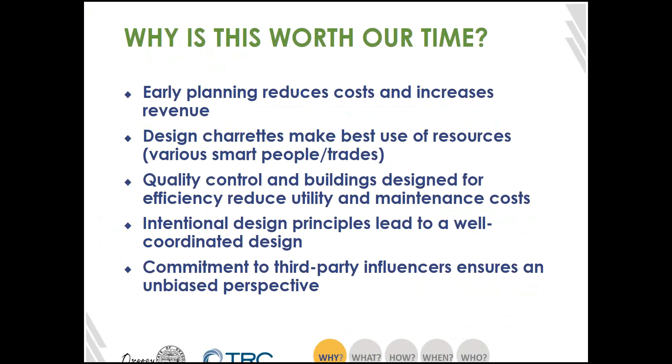There's all sorts of applications of waste within this process. And by doing an intentional design process ahead of time, you can really stem that waste down, make the best value of the resources you have in front of you, both the materials as well as the human resources, the smart people and the trades that you're hiring. You can reduce utility and maintenance cost, and you can really lead to a well-coordinated design and a well-coordinated design follow-through by following some of these best principles.

So the good news is that there's great evidence out there that projects that have gone through either an integrated design process or an intentional design process have better outcomes. They're able to reduce costs, depending on the study you're looking at. The UK Office of Government Commerce found 10% savings on the cost of construction on a single project. Some other materials we've looked at have said there's 30% savings potential across construction over a series of projects. You can really reduce design cost, reduce implementation cost, and still adhere to advanced design principles and reach more advanced goals on energy efficiency, on design, on everything else.

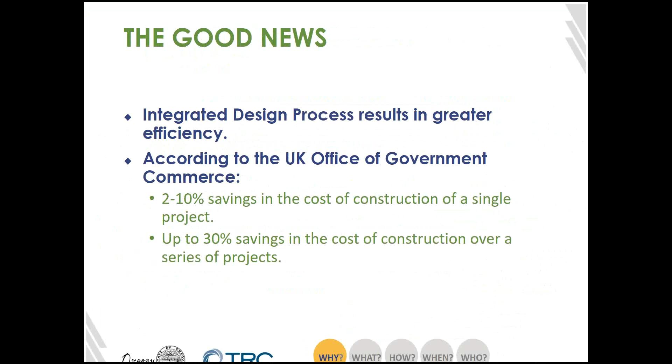So the value of this to the owner and the developer is that it reduces costs. It ensures that there's minimal changes and increased oversight to the construction schedule and the quality of work. It ensures that the principles and intentions you're trying to put forward in your project actually have follow through down the entire course of events and get implemented properly in the field, verified in the field, that all of that intentional design actually gets implemented in your buildings themselves. And the process gives a great feedback loop of construction cost, performance data, the kind of information that helps your business practice operate appropriately and increase profits.

One great example of this is from a firm called Green Canopy Homes. They were a small, one or two home a year builder that expanded and tried to get into that middle range of 10 to 20, focusing on townhomes quite a bit, and they really wanted to reach that niche market of green, of energy efficiency. And they did very well by following an intentional design process to achieve that.

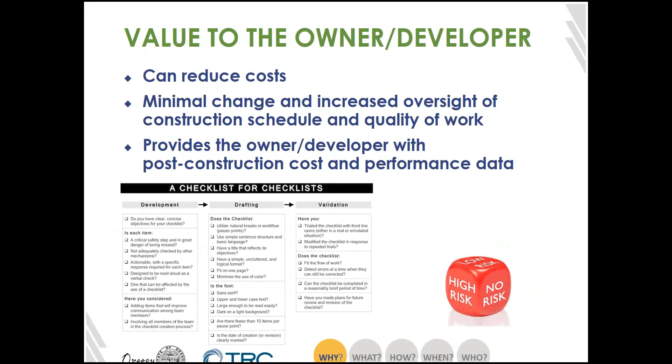So I'm going to turn it back over to Dan.

Thank you, Matt. Now we're going to get into what we actually mean by some of these terms, so we'll dive in a little bit into this difference between intentional and integrated design. But first, let's just talk about at a minimum. We don't want to scare you away. This isn't the kind of thing where we're saying you need to dive into the deep end without your floaty arms on. This is more about taking this in an incremental step. So at a minimum, what are we hoping you'll take away from this?

We hope you can start off by committing to a pre-construction meeting. So before hammers start hitting nails, can you get a meeting together that makes sure you have the right people in attendance, meaning your key trades, your designers, your energy consultants. And we really want to see that the plans get reviewed before any construction happens, that energy efficiency measures are included in both the plans and the scopes of work for all the trades, and then key responsibilities are assigned to make sure that this will actually happen as it's designed.

We really want to hammer home that having the right people in the right meetings and getting the right responsibilities into the right scopes is the magic that makes this happen.

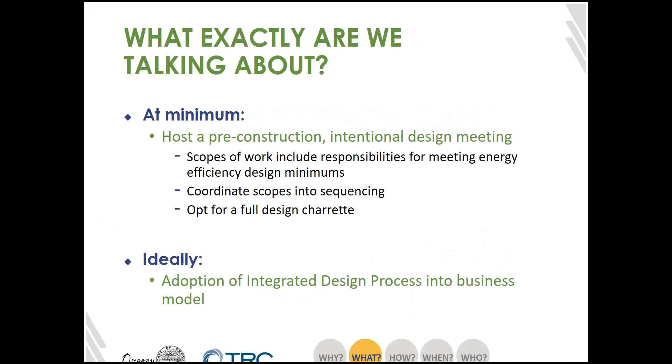So now let's talk about this difference between intentional and integrated design. Those of you from the architecture background, or who have been in green building or energy consulting, are probably familiar with integrated design as a topic. And some of you with your Six Sigma black belts and lean production training are probably familiar with integrated project delivery.

Today, we're really focusing on intentional design, the first step here: really making sure that roles and responsibilities are very clear and assigned, and that a champion leads some sort of pre-design meeting that puts these things into place and helps ensure that what is spoken for at the beginning is actually carried through the entire process.

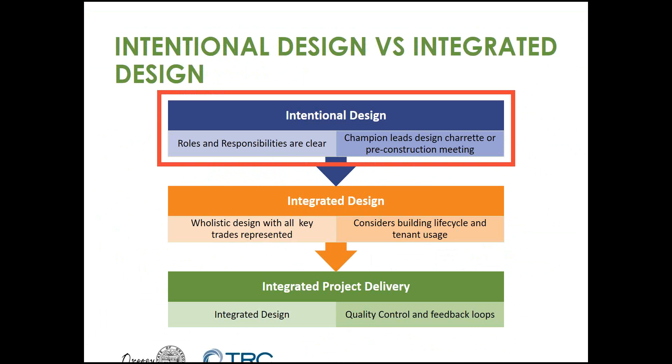Now that said, you don't have to stop at intentional design. That's our minimum. It turns out the value actually increases the more you adopt the integrated design process. It allows you to think about things in different terms, and really focuses on being able to adjust as you go and having open channels of communication.

A version of this probably already exists for you. The problem is, for most developers and owners, they don't have it written down. It's not formalized, it's an informal thing, and this allows for gaps to happen. It allows for mistakes to be repeated historically over time. So formalizing it is a key to helping improve your designs and lower your costs.

Integrated design can actually open plenty of benefits for a minimal or even zero incremental cost when performed repeatedly, as the example that Matt just gave with Green Canopy Homes.

On top of all that, depending on the programs you're in, some programs such as LEED, National Green Building Standard, and some others similar to that will actually give you rewards in terms of points, or in some cases even incentives, for doing integrated design or early design assistance meetings or design charrettes.

Currently, the Oregon Multifamily Energy Program doesn't have a specific incentive for this, but if you've looked at how our incentives work, you get a greater incentive per kWh saved the more whole-building an approach you take to this. We are firm believers that intentional design is a critical piece for those of you following the whole building path, whether it's retrofit or new construction. So in a sense, this is one of those key pieces to helping make sure you're cracking open the higher incentives per kWh saved.

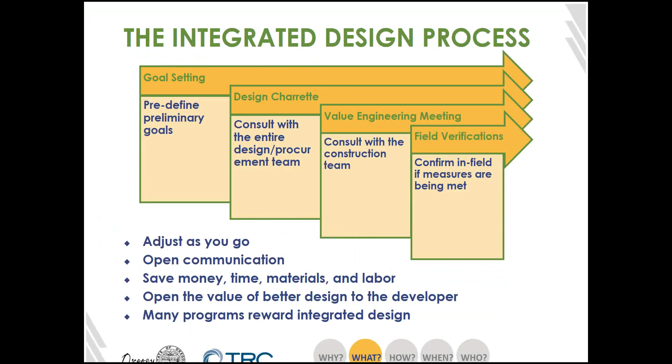And quite honestly, I spent 15 years in the construction industry. When we got to do jobs that started with intentional design or integrated design, it was honestly more fun for everyone as well, because everyone has a slightly higher degree of buy-in and is a little bit more on board with making this project work.

So with that, I'm going to hand it back to Matt, who's going to talk through the next section with you. Thanks, Dan. So on the how side, first let's go through the anatomy of intentional design, some of the big concepts we've already spoken of in prior slides. There's a bit of a rehash as well, and that'll come up as we go through various themes.

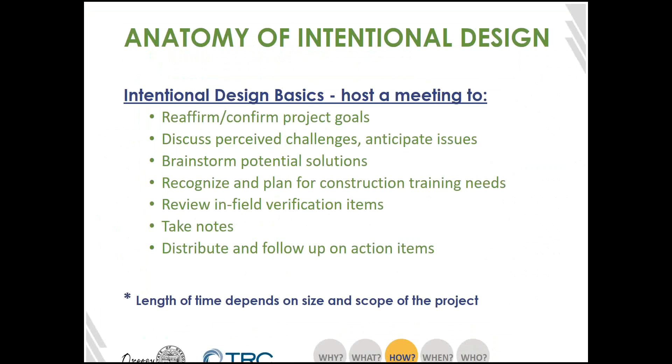So planning for that meeting in the pre-construction support is valuable. If this sounds like a lot, the truth is you're already doing this to some level. You're already gathering your team together to make sure that everyone is on the same page. You probably host a safety meeting. You can hijack that exact meeting and extend it or build upon it. If you're already bringing your trades and your design folks together for other purposes, build on top of that.

You're already doing a lot of these aspects, or a lot of the machinations of getting an intentional design meeting together, at some other aspect. It could be informal conference calls, it could be just through email, but you're coordinating these things. What we're suggesting is a broader structure to bring that together.

Before you get to the meeting, though, once you've had this scheduled, there is a little bit of prep to make sure that you have everything you need in front of your fingertips, to make the best use of that time and having all of those people in one room, or around one table, or at the job site together. The formality of this can be fairly variable based on the scope of your project, and what you're trying to accomplish out of it.

Some of the key things that we've seen highly valuable to a proficient energy efficiency design meeting: one, you need a champion. You need someone whose role it is to make sure that the energy efficiency aspects stay in the limelight and are thoughtful throughout all the other aspects happening in any of these meetings. It's very easy for energy efficiency components to fall out of the scope of work without anyone realizing those were intended from the beginning. So having a champion whose job it is to see it through is highly valuable.

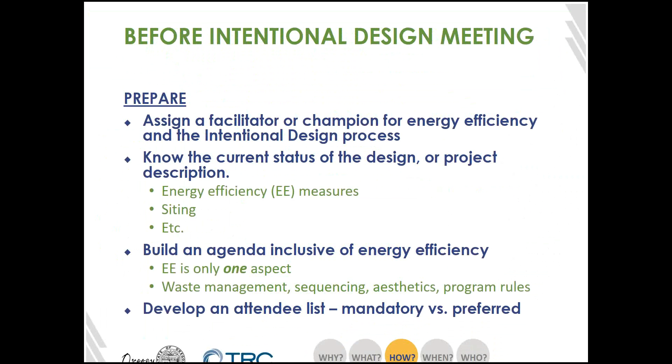And then after the design meeting, there's follow-up. Make sure that what was discussed in that meeting is embedded into everyone's scopes of work, reviewed, and embedded into the plan sets, the scope of work. What do you need to do to follow through and make sure the intentions set forth in that meeting get implemented into the actual construction?

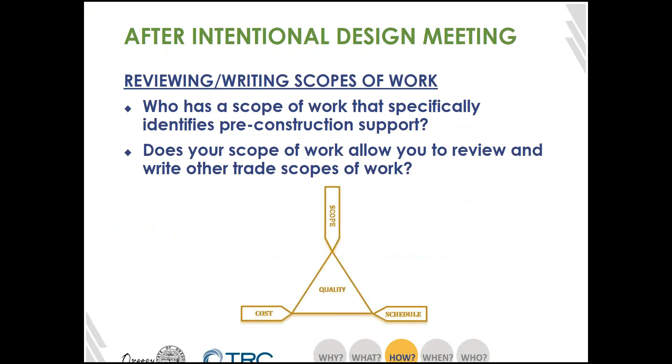The biggest one there is the scopes of work. We have a little example—a story of a project that was doing a slightly different version of rigid exterior insulation on their building, outside of what their typical trades had normally done. They did a great job—they put a detail into page 31 of their construction plan of exactly how the flashing and the arrangement between the window, the rigid exterior, and the flashing needed to go to meet everything. And they thought they were good.

But they also didn't talk to their framers. They didn't sequence and arrange between the person hanging the rigid exterior and the people hanging the windows and doing the flashing, to make sure those two were on the same page and understood this ahead of time. And lo and behold, at the end of the day, they installed a window where the flashing is behind the rigid exterior, which doesn't do the intention they set forth.

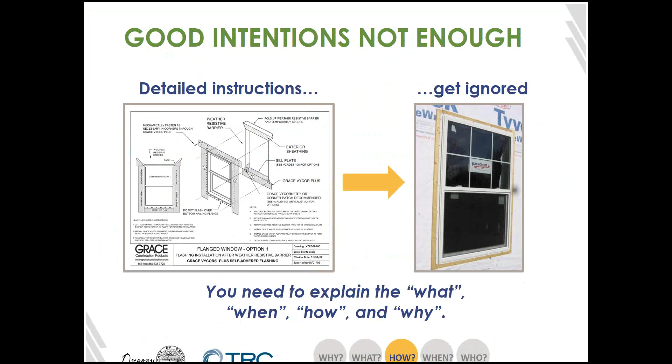So good intentions are great, but you need those various steps of follow-through. Make sure everyone's aware of it ahead of time. Make sure it's in their scopes of work. Make sure it is in the plans themselves, and then verify that it got done before they do 40 windows, not after they've only done one. That way you get a success story, rather than having to go back and spend a lot of time and money correcting an issue post-construction.

So to kind of rehash all this, how do we set up for success? The first step is to make sure you translate any energy efficiency, indoor air quality, or comfort measures into people's responsibilities and then into their work scopes. Make sure you translate the goals of the project into the concrete actions of how you achieve those goals.

Next, make sure you understand how those decisions impact budgets, materials, purchasing, sequencing—all the aspects of how that gets implemented—and that people know where it fits into their own business plans and their work as trades on the project.

Make sure you have an internal coordinator, or the champion we talked about before, to see this through and provide quality control so energy efficiency remains part of the project scope and project intentions. And then have the right people at the table for all of this. Once again, we're going to talk about the who in a couple of bullets.

And with that, going back to Dan on the when. Thank you, Matt. So when does it make sense to spend the time on this effort?

Well, if you've been in the construction industry for any appreciable amount of time, you've probably heard one of these two sayings. The first is measure twice, cut once. It's an old school saying, and every good carpenter has some variation of this. But this all stems from the same basics: make sure you know what you're going to do before you try to do it.

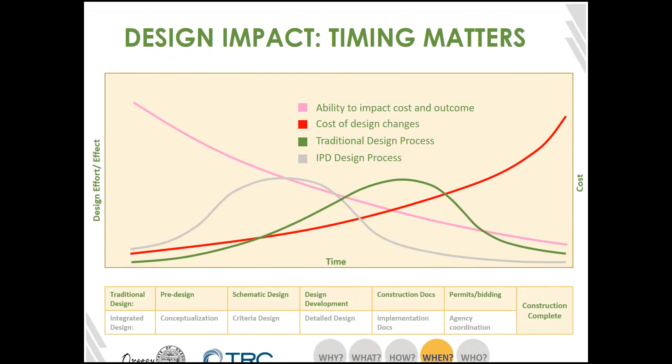That brings us to a good example: energy modeling. Typically we've seen programs where the energy model is submitted halfway through or near the end of construction, because that's when they had to do it.

Instead, think about doing the energy model, at least the preliminary model, when we first get the initial idea of the building's size, its location, and some of the minimum requirements it may have associated with code and above code.

For the intentional design process, you take that initial model and sit down with the developer, the owner, and the designers, typically at least the architect and the HVAC designer, and perform optimization on the model in a live setting where people can actually see potential outcomes.

What's the energy efficiency or proposed energy consumption of this building going to be like with this set of choices? If you're in the Oregon Multifamily Energy Program, imagine choosing the smart home bundle and seeing how that changes things. What if instead I look at the envelope bundle? Once you start down this path, you begin to see the benefit of the whole building modeling path.

Again, you're able to maximize your incentives because you've put that time and effort into the design, making even the optimization portion of energy modeling a collaborative process with the folks who have the design mindset. There's nothing like showcasing the benefits to a building owner and developer really early in the process.

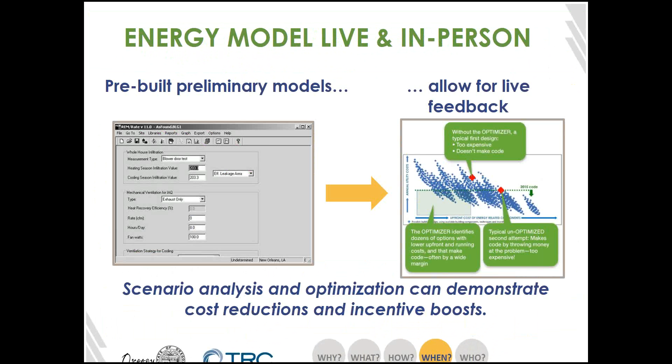It doesn't stop there, though. Sometimes during construction we realize sequencing challenges or that the materials we initially purchased, or that are readily available on the market, don't align easily with our efficiency goals. So we've got a scenario here.

The panels that were readily available unfortunately had metal-to-metal connections. So they had to develop a process for taking the existing panel structure and putting a protocol in place so they could actually meet the passive house standard.

They created a team of four workers who practiced together on a mock-up version on the ground beforehand, looking at peeling off the membrane, bolting a connection plate with proper thermal bridge spacers and air sealing gaskets, repatching with mineral wool, replacing the membrane, and taping it back up.

They streamlined this into a very fast and efficient process, repeating it panel by panel very effectively throughout the entire project. They also had someone who wasn't one of those four doing a quality check after them on every panel.

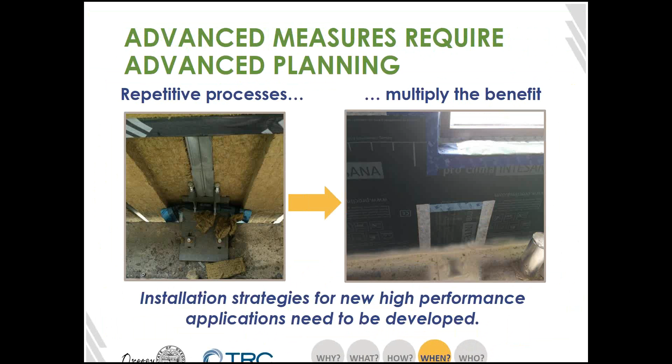They do it for lots of reasons. Yes, cool pictures for sure, but they're really doing this because they want to look at things like how can we improve flight stability? How can we reduce wear and tear on our airplanes? How can we improve fuel mileage? How is this new carbon fiber wing going to perform in wind shear? They're able to actually do that with very few consequences by building a to-scale model and testing it in near real-world conditions.

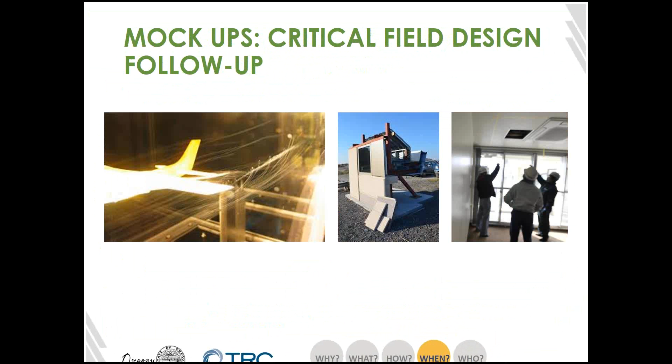With that, I think I'm passing it back to Matt, and he's going to talk a little bit about the who. All right, so who needs to be at the table? We've mentioned already a few times some of the various people. We're going to go through the why, what, and when, and finalize the who aspect right now and what's critical to your project.

Having the right people at the meeting is absolutely vital. You have your design side of it, of those who are actually making the decisions of what gets implemented in the field. That is your architect, your HVAC engineer, your energy consultant, your developer. And then you have the implementation side, your site staff, your key trades. And then you also have sort of your associated need-to-know side of the utility program, the property manager.

And bringing in all those folks together and having an internal champion on energy efficiency is what makes this work. And that internal champion doesn't necessarily need to be the energy consultant. We've seen lots of examples where that is the architect themselves or the developer or someone from the developer's staff. That is really their focus, is that you're going for LEED or you're going for some advanced energy efficiency metric. But someone needs to be at the table that is that champion and seeing it through.

But in the case where the champion is the energy consultant, oftentimes in sort of traditional design processes, the energy consultant isn't historically or traditionally part of the design team or seen that way. That truth is changing quickly. The energy consultant is a vital design element to an energy efficiency project.